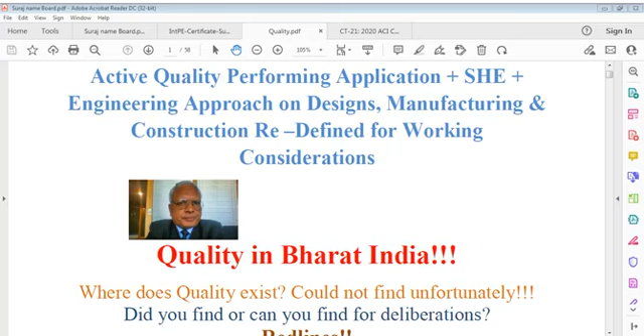Where does quality exist? This is not really a question. I can say I could not find this answer because this answer is not available - it's never available. You have to find your answer yourself. The question then comes: did you find it, did you find it for deliberations? Your answer should be yes, I have the smartness to respond to questions or queries. How can I not do that? I am a quality person. I have experience on such works, and that experience and knowledge or theory, whatever is there, I understand it.

That's where you can say, that's what we can say, deliberations. You have to do quality deliberation, it is not so simple. You can deliberate only when you know what to do, how to do, where it applies.

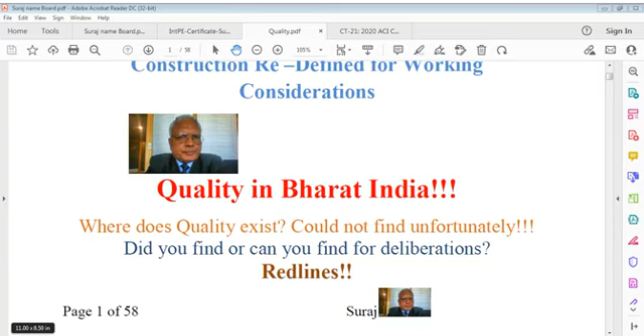That's a very important point. As I said, red lines, it doesn't mean red color. No, it means something in question. An answer has to come. Every day I talk about this, but writing is one part and explanation is another part.

When I say worsening state of quality, what does it mean? This means there should be quality. Quality may be defined for sake of documentation, but for sake of implementation, it's not cared for. It may be, but what I mean is, what's happening doesn't tally with what's required.

Irrespective of what sort of organization you have seen, people are same, workers are same, vendors are same, thoughts are same. Work culture depends on what sort of people you have in your group, your staffing personnel, what sort of control exists on works.

Are they also serious? I don't want harassment either. If something has been done properly, it is to be accepted without any hitch. And if something has not been done, then it has to be done and modified.

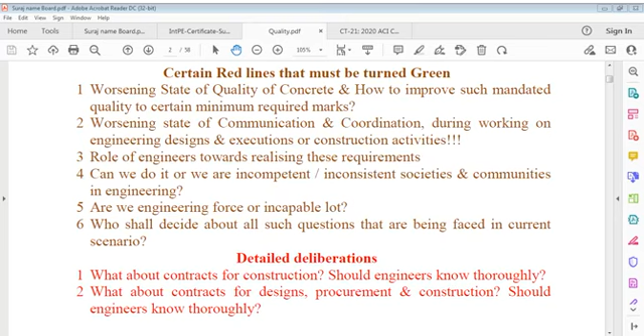That's why it's important. We say we do detailed deliberations, what are those details? You can say, what about contracts for construction? Should engineers know thoroughly, is that no question? Think so, the question is very easy. What about construction contracts, and how much do engineers know about that? Or for them is it just a contract? They have to understand the contract, the meaning of the contract.

It's not just a very small contract. Construction contracts are very long duration contracts, maybe these work for years sometimes. So you can say a construction site is sometimes like home, like home for coming years. Maybe 1 year for someone, 2 years for someone, it depends. And we know there's always availability of workers around who are involved on that project, and generally they live around, so that site also becomes home for them for some period. This means so many activities are involved, that's why so many people are there.

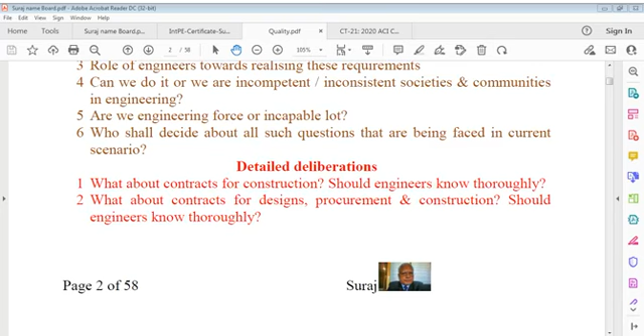And if we don't understand the quality of contract, you cannot understand anything. It's not a simple document. It's a document that has to give responsibility and credit to whosoever are involved in this operation. It's not that I can complete this discussion all at one time.

If you understand the quality system, you have to understand all other systems as well - quality system, environment system, construction system, design system, whatever is expected. If we are educated, of course we are, not all, but at least 25%, and another 25% are only those who work somewhere without even use of these technical words. This means we are very clear, and we have to apply this knowledge with a very decisive mind. When you do designs or construction, we have to be very serious in understanding everything. We cannot just do something without even referring to documents and later say, oh, it happens, no problem, I didn't study the document. If some engineer says that, how do you expect that engineer to be matured enough?

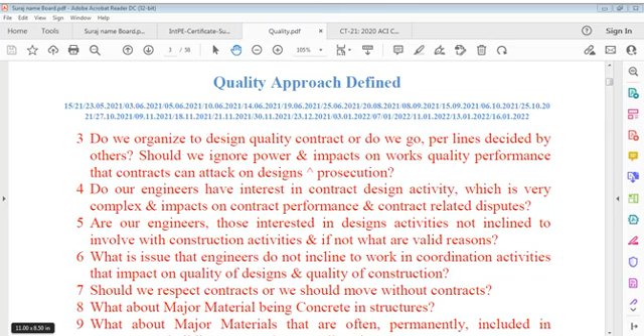That's why I say there's a long discussion on this, and we'll keep at it every day. We cannot move on without proper attention. We have to respect - we have to respect the project's quality, we have to respect time, we have to respect the provisions on contract data, because we produce that. We produce that, no one else.

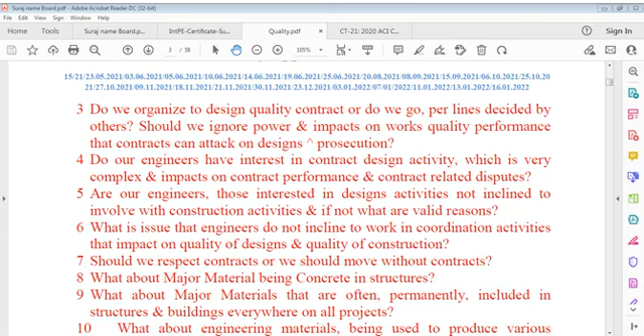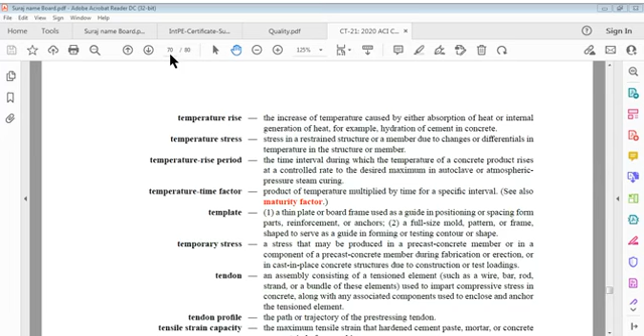We have to go to the other file also, because we cannot take full time on this. We have to go to other files as well, and that is a very important file - the concrete terminology file, where we had gone through fully, and there were some points, I think it was 70 pages. It covers temperature rise, temperature stress, temperature rise period, temperature time factor, template, temporary stress, tendon, and likewise. We discussed something last time and we discuss it again. It's not that this 70 or 80 pages is just going to finish - I'm not interested in running very fast to finish it, because finishing is not required, understanding is required. We have to understand what is there and how it is there. That's very crucial. We have to be very practical in this regard.

Let me see the temperature, what the station shows now, because I'm feeling very cold. I don't know if I'm sick or what's happening. It's showing 10 degrees, dew point is 9 degrees, so humidity is 97% - that's the problem here. 97% humidity at this moment, so this temperature of 10 doesn't really mean 10, it means maybe 5 or 4 because of the humidity. And cloud cover is 40%, meaning 60% is not covered, and the height of the cloud ceiling is 12.2 kilometers. So it's really different - in the day it's expected to be 19 degrees, and at night maybe 9 degrees, with expectation of rain at night. No problem, we just thought of this one way or other, and thought about what to do, because I was not feeling well. But I have to continue this talk. I don't want to just jump down and also...

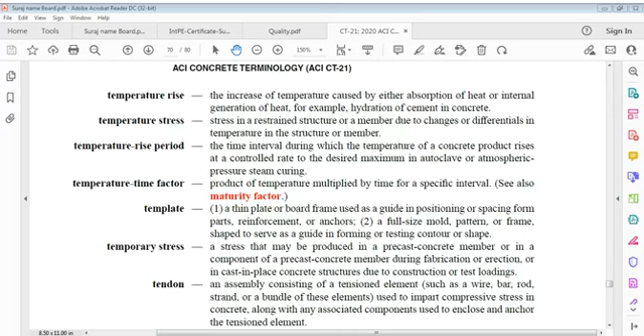Temporary stress: stresses that may be produced in a precast concrete member or in a component of a precast concrete member during fabrication or erection, or in cast-in-place concrete structures due to construction or test loading.

Tendon is an assembly consisting of tensioned elements such as wire, bar, rod, strand, or a bundle of these elements used to impart compressive stress in concrete, along with whatever associated components are used to enclose and anchor the tensioned elements.

Tendon profile: path or trajectory of a pre-stressing tendon.

Tensile strain capacity is the maximum tensile strain that hardened cement paste, mortar or concrete can sustain before cracking occurs. You may also call it tensile strain limit or capacity.

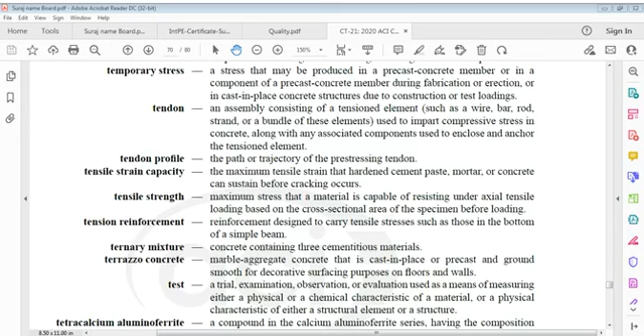There is a concrete called terrazzo concrete, which means marble aggregate concrete - marble being a metamorphic rock. It's marble aggregate concrete that is cast in place or precast and ground smooth for decorative surfacing purposes on floors and walls.

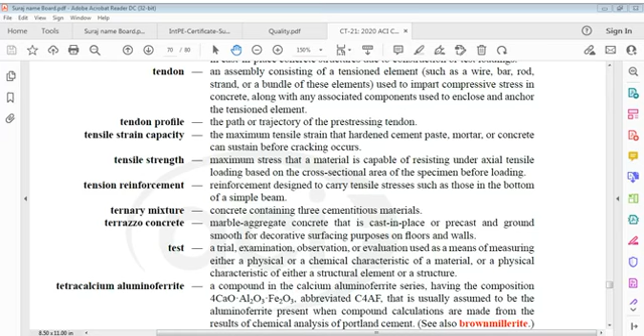Test: a trial, examination, observation or evaluation used as a means of measuring either a physical or chemical characteristic of a material, or a physical characteristic of either a structural element or a structure.

Tetra calcium aluminoferrite.

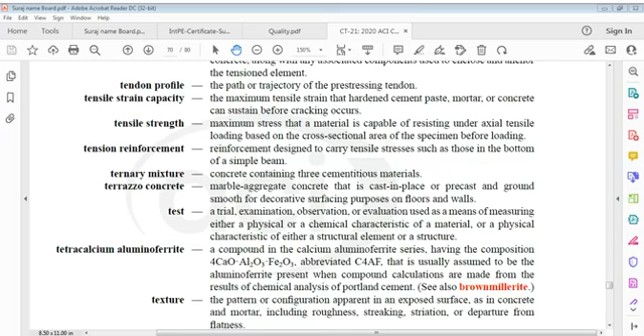Tetra calcium aluminoferrite. The name is long. Tetra stands for 4, approximately - we say tetra, not territory. You can see it's a compound in the calcium aluminoferrite series, that is why it's called tetra calcium aluminoferrite. This is a compound in calcium aluminoferrite series having composition 4 CaO, Al2O3 that is aluminoferrite, alumino, and Fe2O3.

Now we abbreviate it C4AF. The abbreviation is: C stands for calcium, 4 for tetra, A stands for alumino, and F for ferrite - C4AF. That is usually assumed to be the aluminoferrite present when compound calculations are made from results of chemical analysis of Portland cement. It's also referred to as brownmillerite.

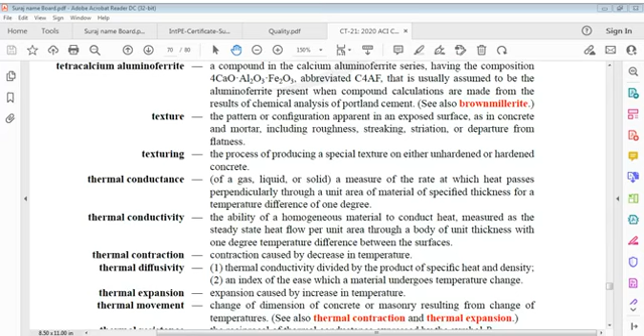Thermal contraction - contraction caused by decrease in temperature. Contract doesn't mean that kind of contract, it is contraction, meaning reduction. Contraction caused by decrease in temperature. When something is cooler, it may contract, and when something is heated, it may expand. So it is the reversal - expansion means the opposite of contraction. Contraction caused by decrease in temperature, or you can say it's very cold and we shiver like that, we say oh I'm frozen - that's a contraction.

Thermal diffusivity - it's like conductivity, thermal conductivity divided by the product of specific heat and density. It tells how much thermal heat energy is diffused. Thermal diffusivity: thermal conductivity is divided by specific heat into density, and so you can get thermal diffusivity.

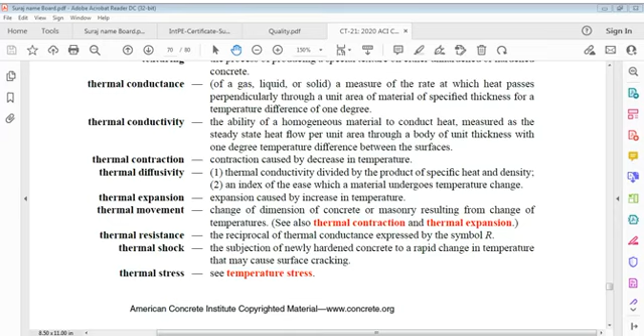Heat shock, you can say. Subjection of newly hardened concrete to a rapid change in temperature, that is thermal shock. If you subject hardened concrete, a new one, to rapid change in temperature, you can say it is temperature stress or thermal shock.

Now, thermal volume change. These are very important definitions. We have to understand this before jumping into learning more, because if definitions are clear, if elementary bases are not clear, it's difficult to understand terms. And here we say thermal volume change.

What is thermal volume change? It says thermal volume, remember, increase or decrease in volume because of thermal change. Increase or decrease in volume caused by changes in temperature. Very simple, and that is related to thermal contraction, thermal expansion. There may be volumetric increase or volumetric decrease, and that is volume change related to thermal energy.

And then thermoplastic, a very common term, repeatedly you can say repeat softness. If you heat something, if you heat some material, it shall soften, right? It shall soften if capable of being repeatedly softened by heating and hardened by cooling. If you heat something, it shall melt, and that can be called softening. And if you cool it, withdraw heat from it, it shall become hardened.

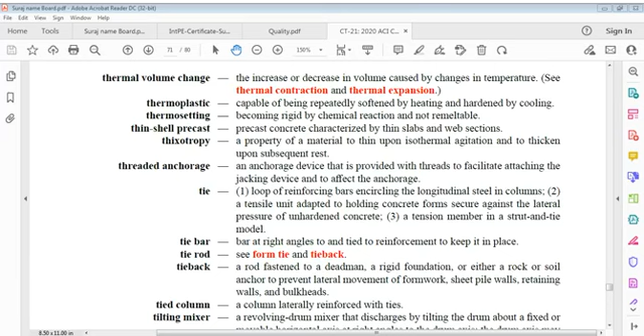Here also we have tied column, a column laterally reinforced with ties. Tied column, a column laterally reinforced with ties.

A column laterally reinforced with ties is called a tied column.

Tilting mixer: a revolving drum mixer that discharges by tilting the drum about a fixed or movable horizontal axis at right angles to the drum axis. The drum axis may be horizontal or inclined while charging and mixing.

Tilt up: a construction technique for casting concrete elements in a horizontal position at the job site and then tilting them to their final position in a structure.

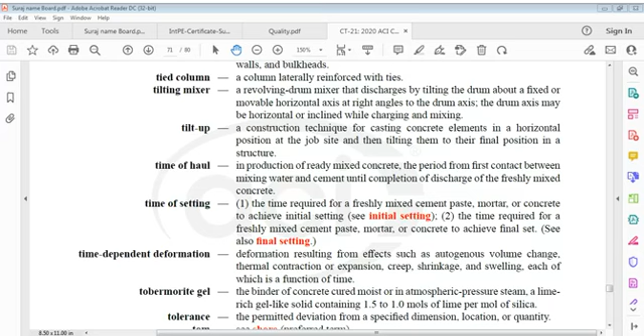Time dependent deformation: deformation resulting from effects such as autogenous volume change, thermal contraction or expansion, creep, shrinkage and swelling, each of which is a function of time.

Tobermorite gel: binder of concrete cured moist or in atmospheric pressure steam. A lime-rich gel-like solid containing 1.5 to 1 moles of lime per mole of silica.

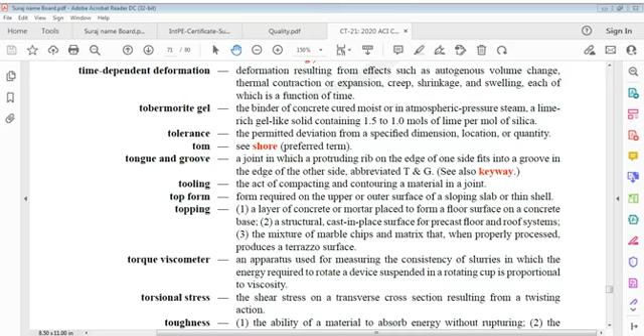Tooling: the act of compacting and contouring a material in a joint.

Top form: form required on the upper or outer surface of a sloping slab or a thin shell.

Topping: a layer of concrete or mortar placed to form a floor surface on a concrete base, or a structural cast-in-place surface for a precast floor or roofing system. Also, a mixture of marble chips and matrix that, when properly processed, produces a terrazzo surface.

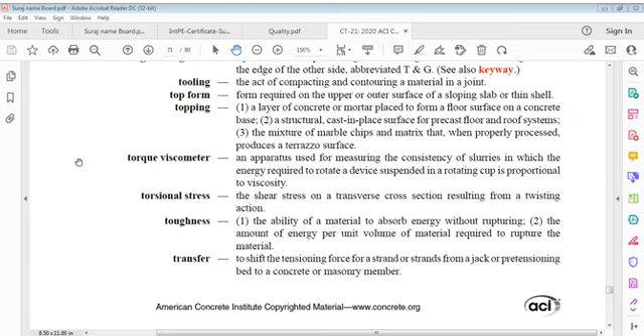Transfer: to shift tensioning force for a strand or strands from a jack or pre-tensioning bed to a concrete or masonry member.

Transfer bond: in pre-tensioning, bond stress resulting from transfer of stress from the tendon to the concrete.

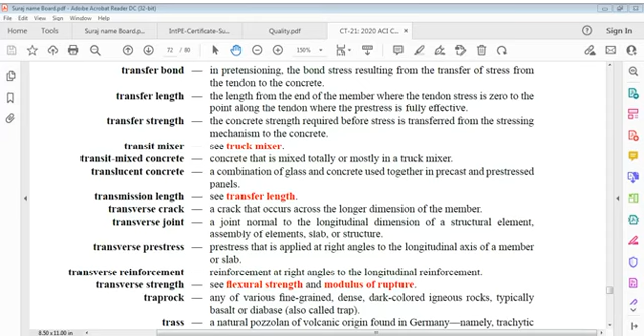Transverse pre-stress, pre-stress that is applied at right angles to the longitudinal axis of a member or slab.

Transverse reinforcement, reinforcement at right angles to longitudinal reinforcement. Transverse strength, flexural strength, and modulus of rupture.

This is trap rock. Transverse strength, flexural strength, modulus of rupture. Trap rock: various fine-grained, dense, dark-colored igneous rocks.

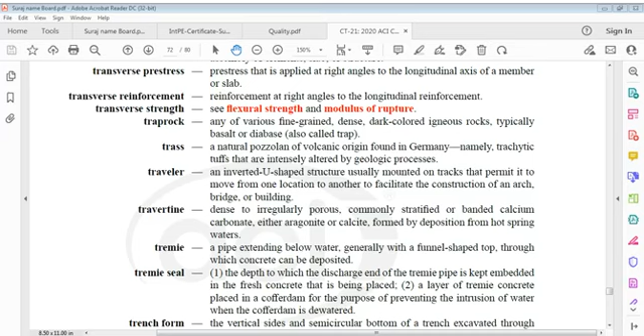Now tremie. Tremie is a pipe, a very important item. Tremie pipe extends below water, generally with a funnel-shaped top through which concrete can be deposited.

Pipe extending below water, generally with a funnel-shaped top, embedded in fresh concrete that is being placed. Layer of tremie concrete placed in a cofferdam for the purpose of preventing intrusion of water when the cofferdam is dewatered.

Trench form: vertical sides and semi-circular bottom of a trench, excavated through compacted soil to provide exterior form and base for a cast-in-place concrete pipe.

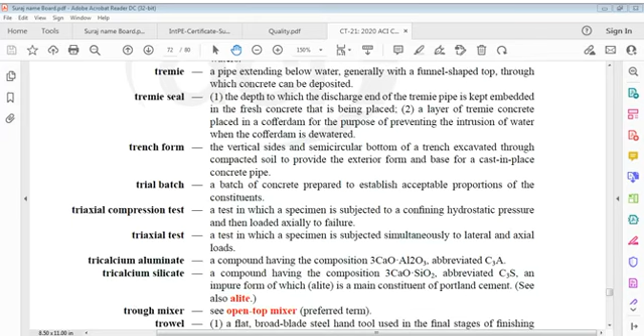Tricalcium aluminate: a compound having composition 3CaO·Al2O3, abbreviated C3A.

Tricalcium silicate, C3S: a compound having composition 3CaO·SiO2, abbreviated C3S, an impure form of which is the main constituent of Portland cement.

Trough mixer: see open top mixer.

Trowel: a flat, broad blade steel hand tool used in final stages of finishing operations to impart a relatively smooth surface to concrete floors and other unformed concrete surfaces. Also, a flat, triangular blade tool used for applying mortar, or a flat, broad blade steel hand tool used to place, spread, shape, finish or otherwise apply materials.

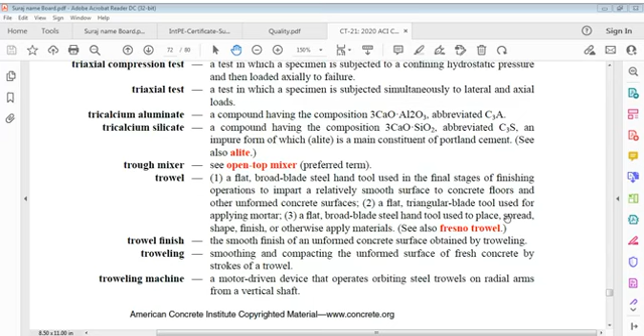Truck mixer: a concrete mixer suitable for mounting on a truck chassis and capable of mixing concrete in transit.

Truck mixed concrete, also called transit mixed concrete. T-shore: a shore with a T-head.

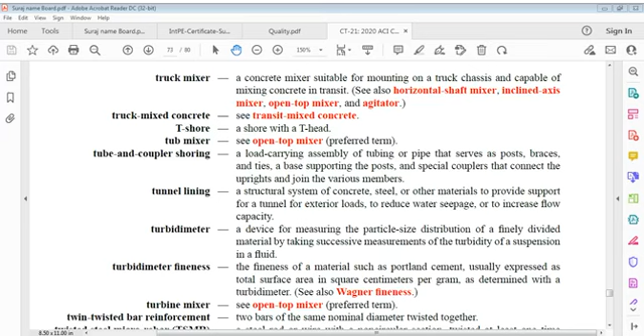Tub mixer: see open top mixer. Tube and coupler shoring: a load carrying assembly of tubing or pipe that serves as posts, braces and ties, with a base supporting posts and special couplers that connect uprights and join various members.

Tunnel lining: a structural system of concrete, steel or other materials to provide support for a tunnel against exterior loads, to reduce water seepage, or to increase flow capacity.

Turbidimeter: a device for measuring particle size distribution of a finely divided material by taking successive measurements of turbidity of a suspension in a fluid.

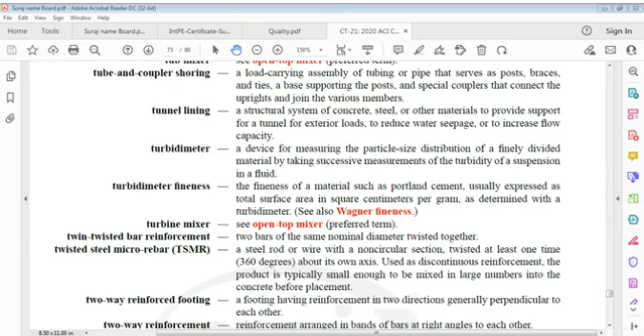Turbine mixer: see open top mixer. Twin twisted bar reinforcement: two bars of the same nominal diameter twisted together.

Twisted steel micro rebar, TSMR: a steel rod or wire with a non-circular section, twisted at least one time (360 degrees) about its own axis, used as discontinuous reinforcement. The product is typically small enough to be mixed in large numbers into concrete before placement.

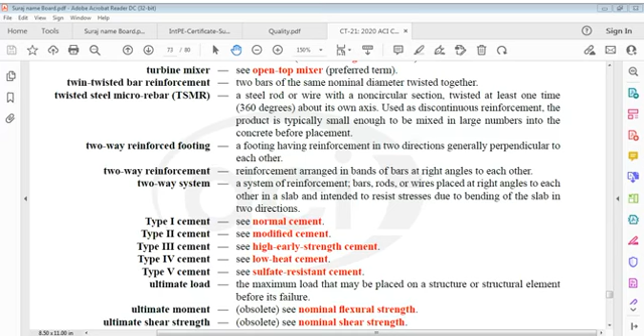Cement types: Type 1 is normal cement, also known as OPC. Type 2 is modified cement. Type 3 is high early strength cement. Type 4 is low heat cement. Type 5 is sulfate resistant cement.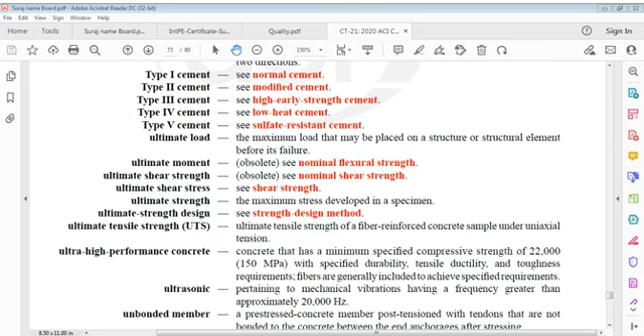We have ultimate shear stress, shear strength, ultimate strength as the maximum stress developed in a specimen, ultimate strength design method, and ultimate tensile strength (UTS). This is the ultimate tensile strength of a fiber reinforced concrete sample under uniaxial tension.

Ultra high performance concrete - that's a very important point. Concrete that has a minimum specified compressive strength of 150 MPa, with specified durability, tensile ductility, and toughness requirements. Fibers are generally included to achieve these specified requirements for ultra high performing concrete.

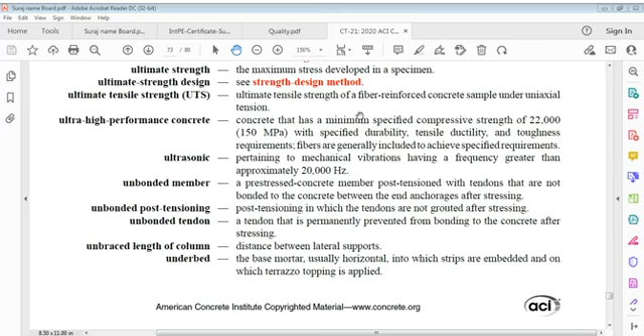Undersanded concrete is concrete containing an insufficient proportion of fine aggregate to produce optimum properties in the fresh mixture, especially workability and finishing characteristics.

Undersize particles of aggregate pass a designated sieve. Underwater concrete is concrete placed underwater by tremie or other means. Unhardened concrete is fresh concrete. Unit masonry is a construction element consisting of masonry units. Unit water content is the quantity of water per unit volume of freshly mixed concrete, excluding water absorbed by aggregate.

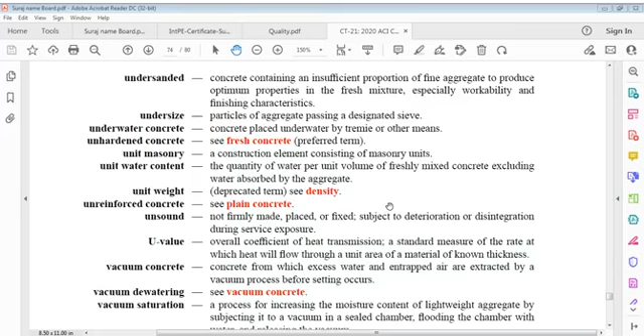What is U value? It's the overall coefficient of heat transmission, a standard measure of the rate at which heat flows through a unit area of a material of known thickness.

That is, you can say, thermo conductance - U value represents transmission of heat through the material. And vacuum concrete is concrete from which excess water and entrapped air are extracted by a vacuum process before setting occurs.

Vacuum concrete is concrete from which excess water and entrapped air are extracted by a vacuum process before setting occurs.

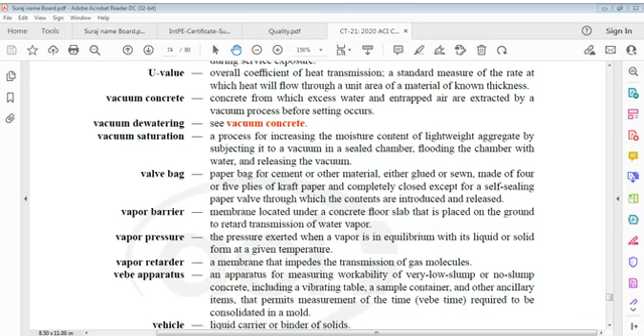Vapor pressure rating: the pressure exerted when a vapor is in equilibrium with its liquid or solid form at a given temperature.

Vapor retarder: a membrane that impedes transmission of gas molecules.

Vebe apparatus, or vebe apparatus.

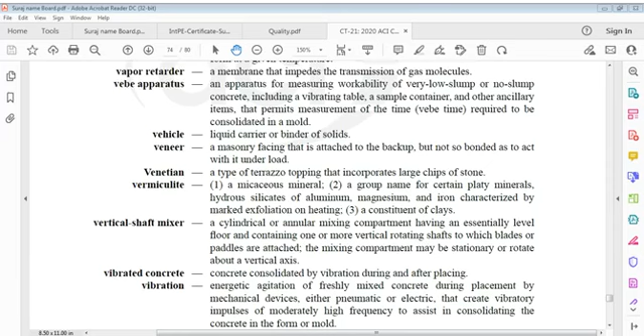Vibrated concrete: concrete consolidated by vibration during and after placing.

Vibration is energetic agitation of freshly mixed concrete during placement by mechanical devices, either pneumatic or electric, that create vibratory impulses of moderately high frequency to assist in consolidating the concrete in the form or mold.

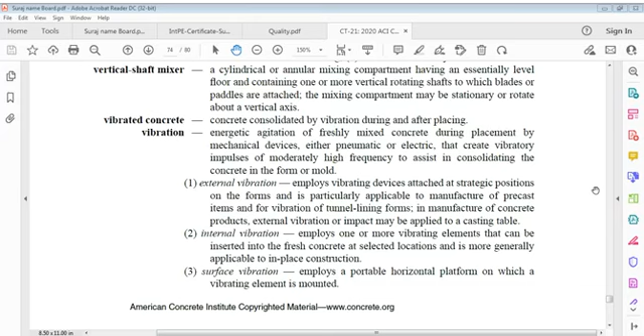Internal vibration employs one or more vibrating elements that can be inserted into fresh concrete at selected locations and is more generally applicable to in-place construction. Surface vibration employs a portable horizontal platform on which a vibrating element is mounted.

Vibration limit: age at which fresh concrete has undergone a sufficient degree of setting and developed adequate strength to resist flow when subjected to vibration.

Vibrator: an oscillating machine used to agitate fresh concrete so as to eliminate gross voids, including entrapped air but not entrained air, and to produce intimate contact with form surfaces and embedded materials.

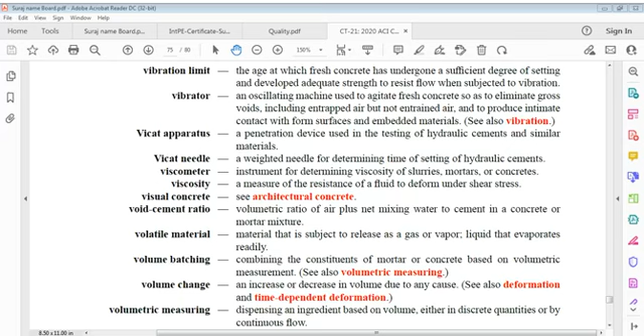Volume batching: combining constituents of mortar or concrete based on volumetric measurement.

Volume change: an increase or decrease in volume due to whatever cause, including deformation and time dependent deformation.

Volumetric measuring: dispensing an ingredient based on volume, either in discrete quantities or by continuous flow.

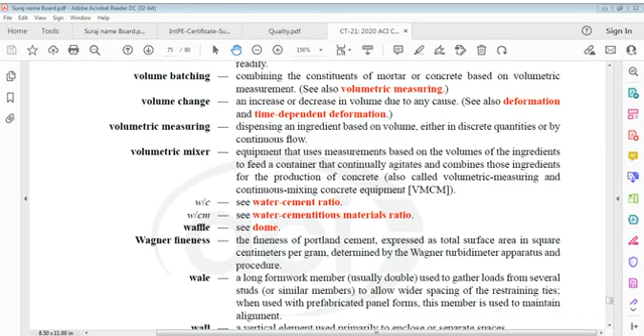Volumetric mixer: equipment that uses measurements based on volumes of ingredients to feed a container that continually agitates and combines those ingredients for production of concrete, also called volumetric measuring and continuous mixing concrete equipment, VMCM.

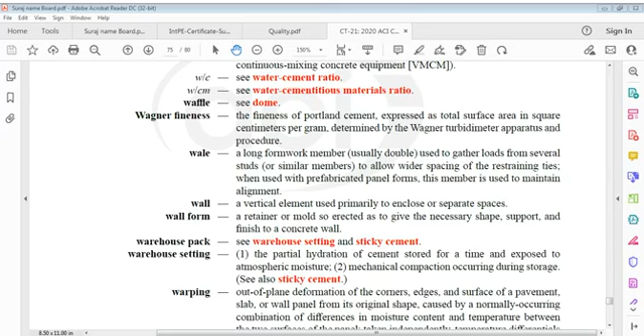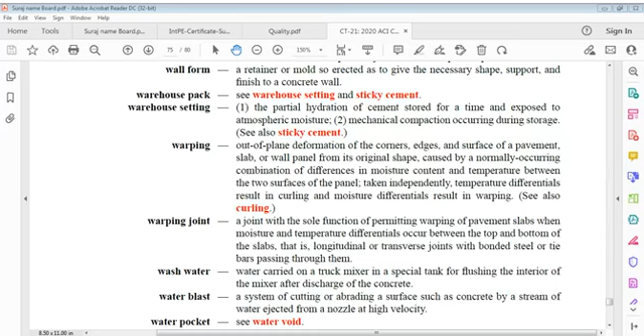Warehouse pack, warehouse setting, and sticky cement. Warehouse setting: partial hydration of cement stored for a time and exposed to atmospheric moisture; mechanical compaction occurring during storage is also part of warehouse setting.

Warping: out of plane deformation of corners, edges and surface of a pavement, slab or wall panel from its original shape, caused by a normally occurring combination of differences in moisture content and temperature between two surfaces of the panel. Taken independently, temperature differentials result in curling, and moisture differentials result in warping.

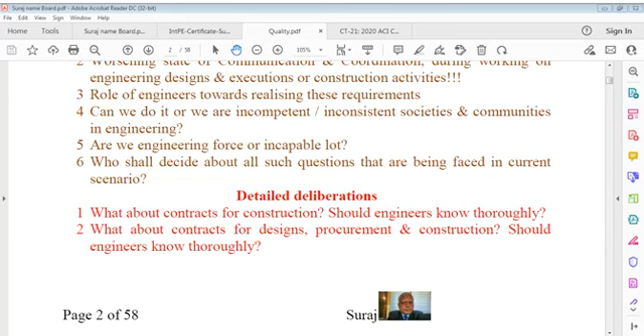We have gone through various terms. Still a few pages are left, and these shall be taken up. Meanwhile, we will continue our deliberations on these very important terms in coming time, because this is all important and very significant from every viewpoint. The title we have gone through is quality concrete specifications, very, very significant.